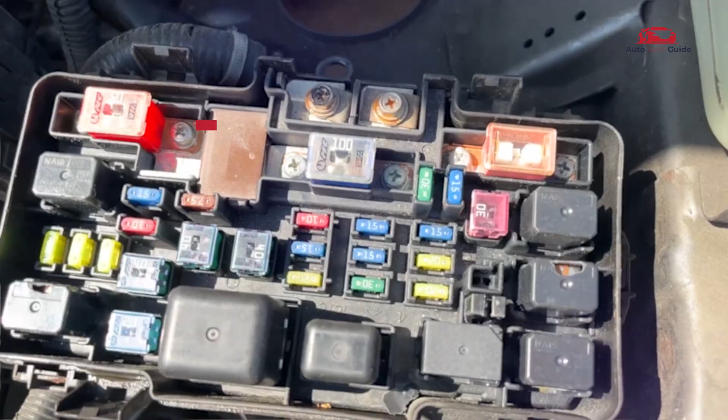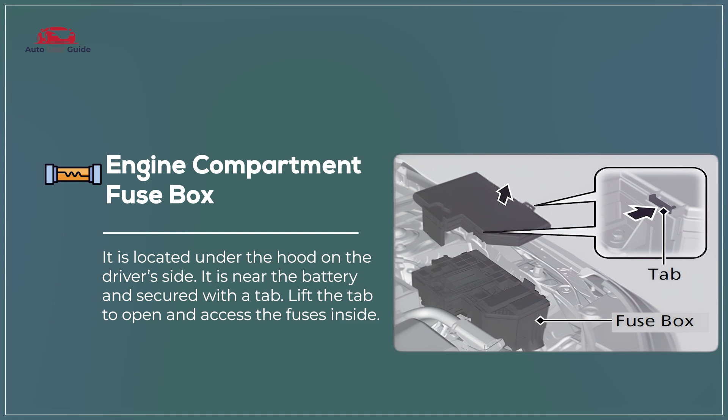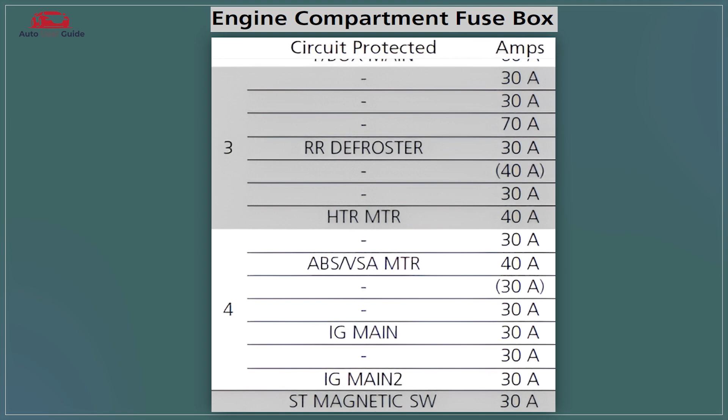Engine compartment fuse box. The engine compartment fuse box in the 2025 Honda HR-V houses essential fuses and relays for critical systems such as the engine, headlights, and cooling fans. It is designed for easy access under the hood with a labeled cover. The fuse box ensures proper electrical functionality and protection.

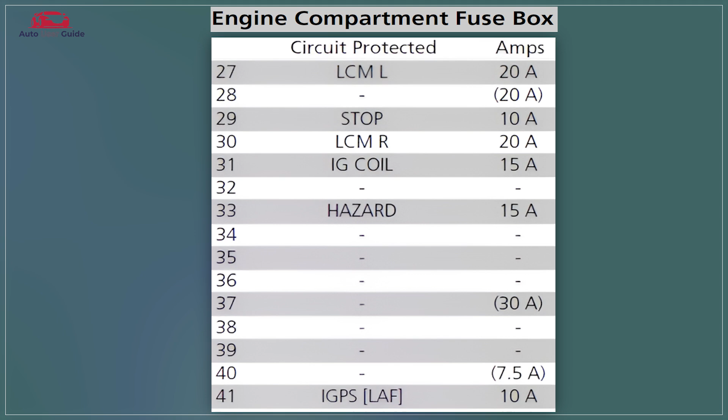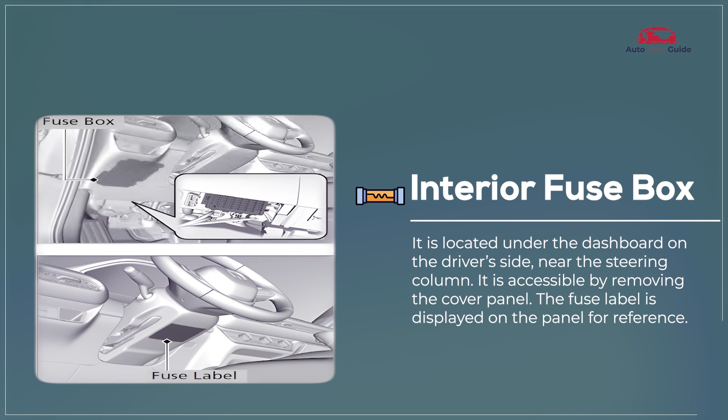Interior fuse box. The interior fuse box in the 2025 Honda HR-V manages electrical components inside the cabin, such as the radio, interior lights, and power windows. Located under the driver's side dashboard, it features a labeled diagram for easy identification.

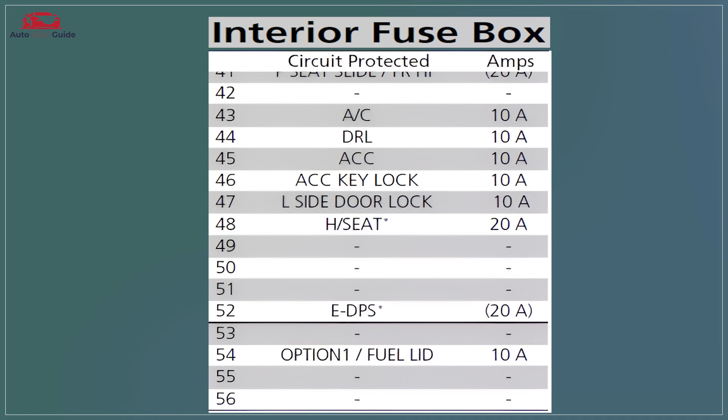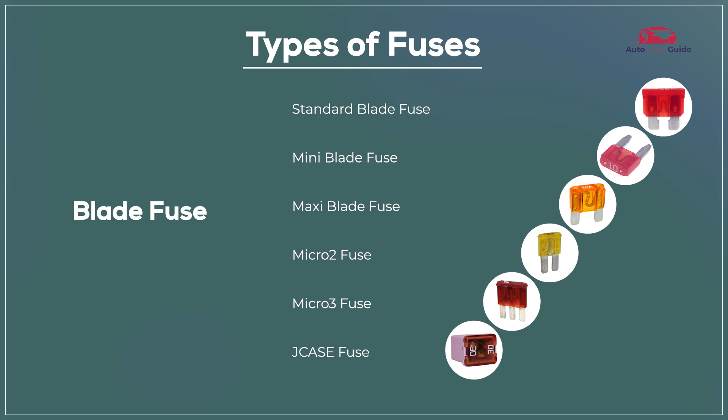Types of fuses: blade fuse, standard blade fuse, mini blade fuse, maxi blade fuse, micro 2 fuse, micro 3 fuse, J-case fuse, glass tube fuse, AGC fuse, SFE fuse, ceramic fuse, Bosch fuse, DIN fuse, PAL fuse, low profile PAL fuse, standard PAL fuse, link fuse, mega fuse, high amperage link fuse.

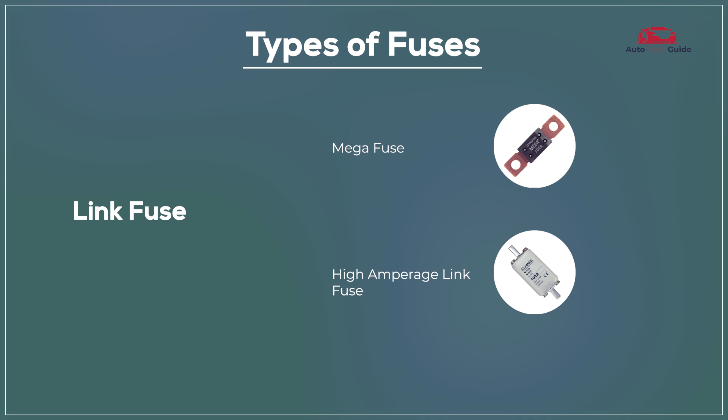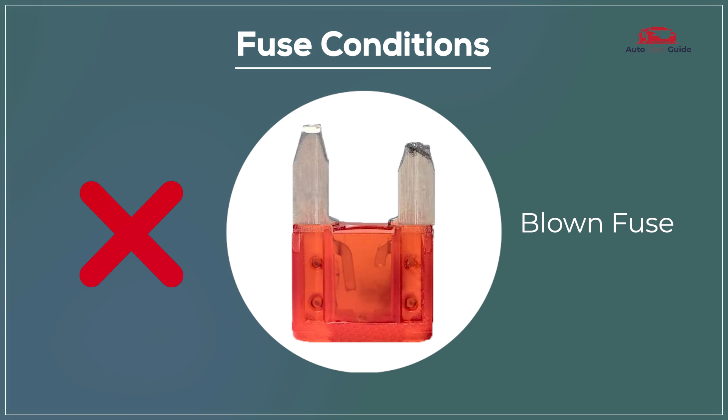Fuse conditions: blown fuse. A blown fuse means it's no longer functioning and needs replacement, while a perfect fuse is in good working condition and performing as expected.

How to change fuses: turn off the vehicle, locate the fuse box, identify the faulty fuse, remove the faulty fuse, inspect and obtain a replacement, install the new fuse, test the replacement.

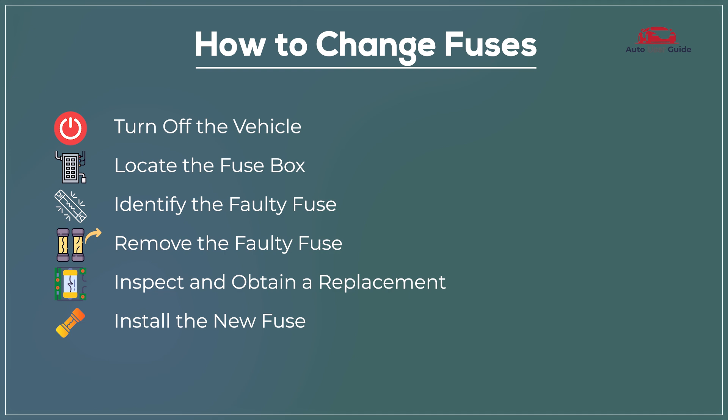Safety precautions: disconnect the battery, wear protective gear, use proper tools, check for correct amperage, avoid water exposure.